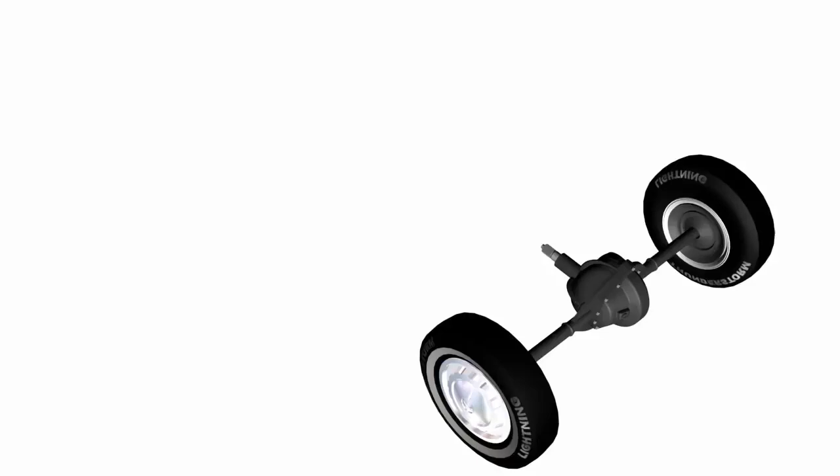Consider a situation where a vehicle fitted with a standard differential moves straight, and one drive wheel is on a surface with good traction, while the other wheel is on a slippery track.

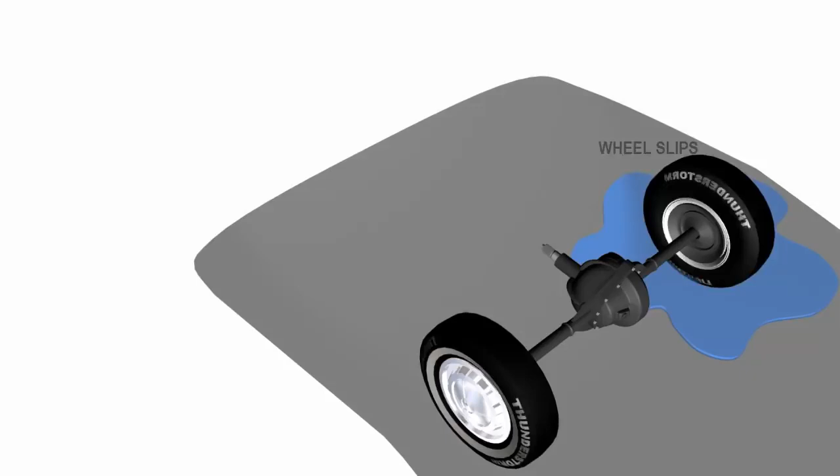In a standard differential, the left and right axle rotations are completely independent. Since one wheel is on a slippery track, the standard differential will make that wheel spin at excessive speed, while the good traction wheel remains almost dead. This means high power supply goes to the slippery wheel and low power flows to the good traction wheel, so the vehicle won't be able to move.

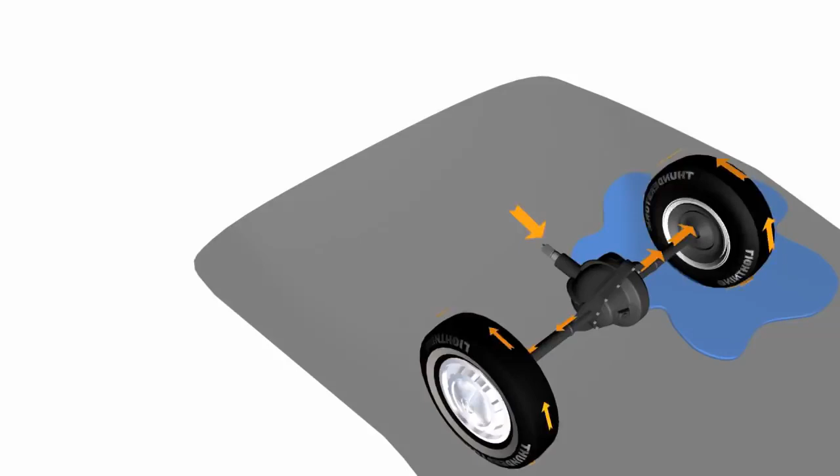One way to overcome this problem is to limit the independency, or relative motion, between the left and right axles. Limited slip differentials are introduced for this purpose.

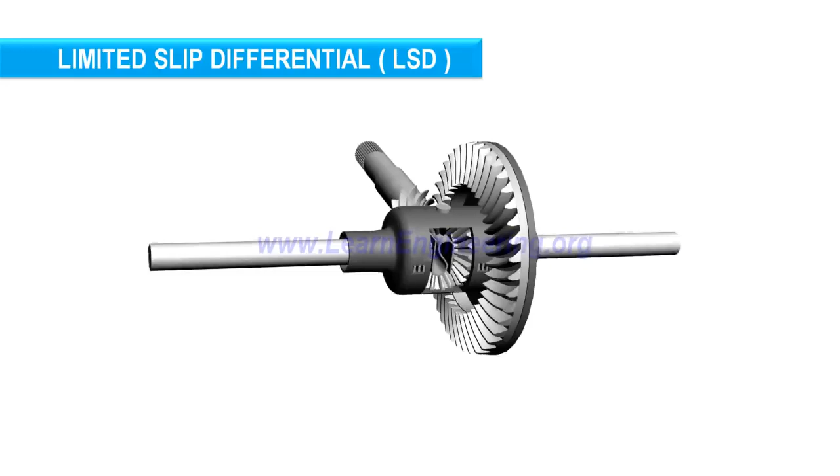One of the most commonly used LSD technologies is clutch pack based. First, let's go through its constructional features.

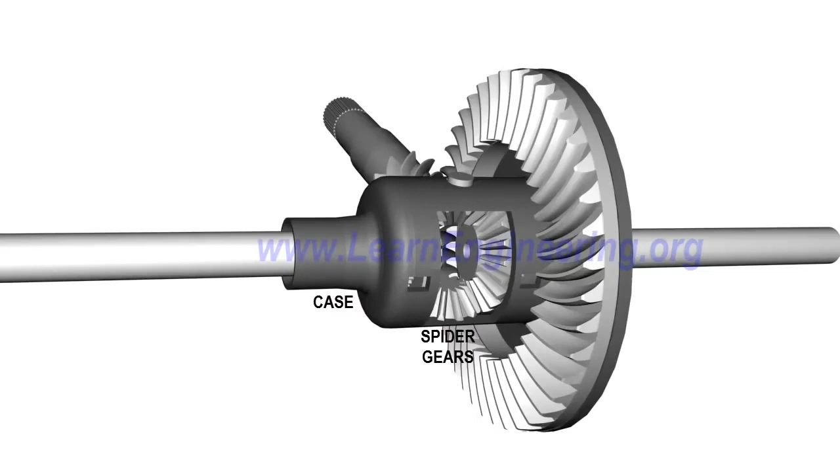Apart from its basic components, a limited slip differential has got a series of friction and steel plates packed between the side gear and the casing.

Friction discs are locked with the side gear, so the friction discs and the side gear will always move together.

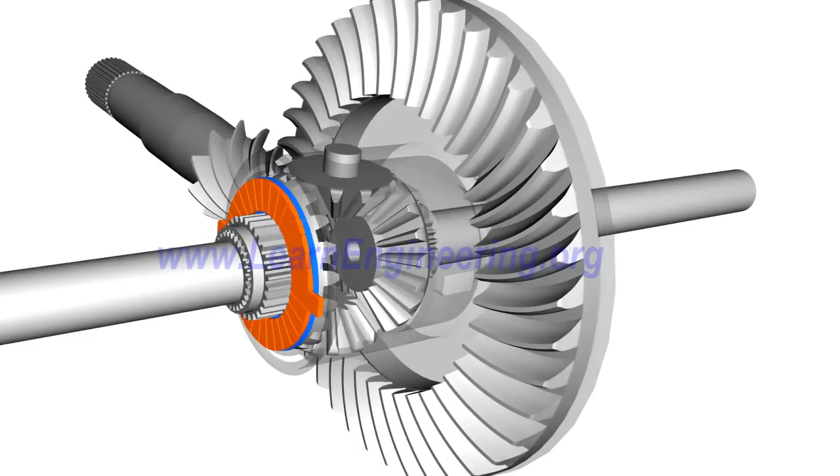Steel plates have external tabs and are made to fit in the case groove, so they can rotate with the case.

If any of the clutch pack assembly is well pressed, the frictional force within them will make it move as a single solid unit.

Since steel plates are locked with the case and friction discs with the side gear, in a well-pressed clutch pack, motion from the casing is directly passed to the corresponding axle.

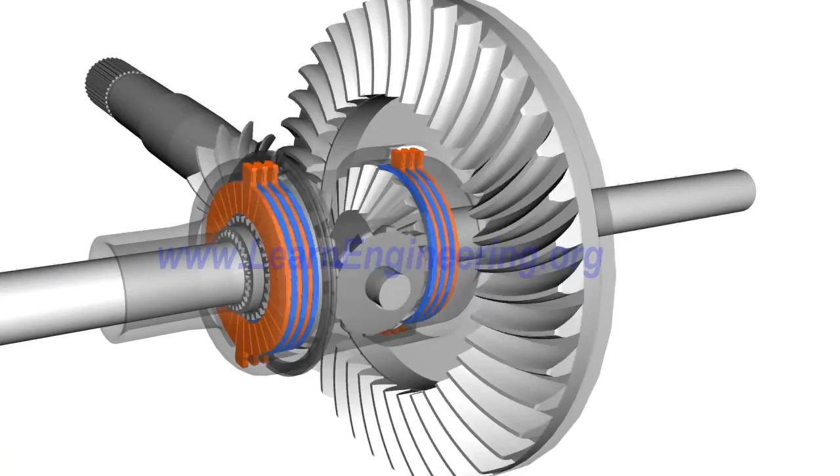The space between the side gears is fitted with a preload spring. The preload spring will always give a thrust force and press the clutch pack together.

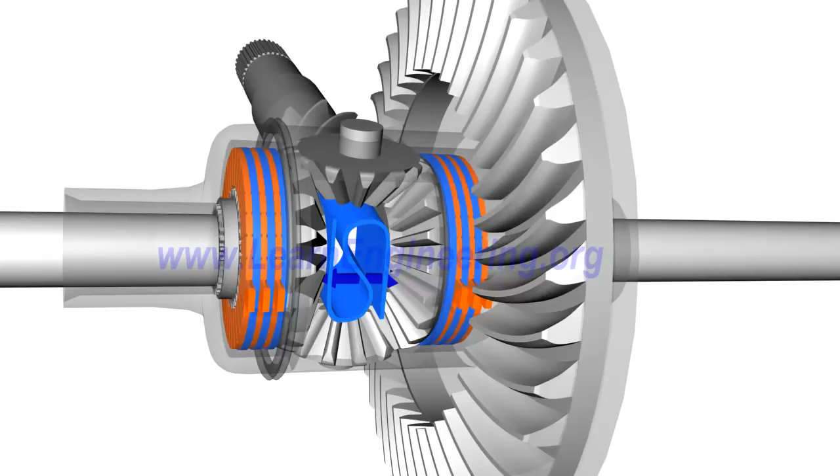You can note that the spider and side gear are bevel gears. It has got one specialty: when torque is transmitted through a bevel gear system, axial forces are also induced apart from the tangential force. This axial force tries to separate out the gears.

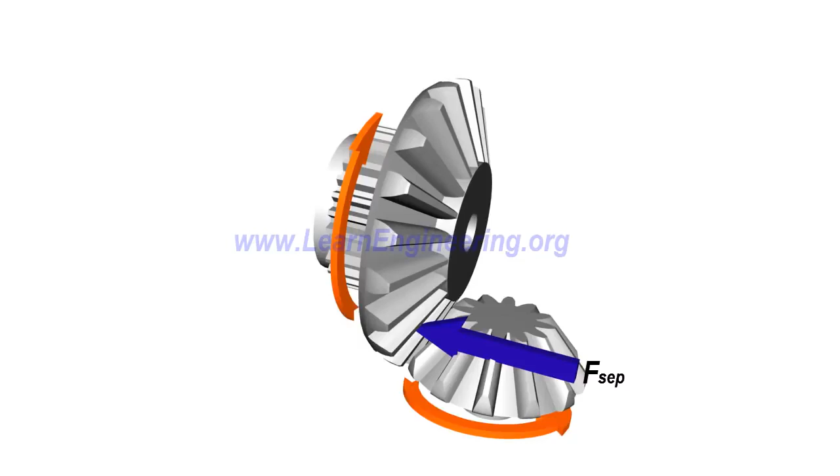You can note that the side gear and axle are two separate units. The side gear has got a small allowance for axial movement. So during high torque transmission through the spider side gear arrangement, a high separating thrust force is also transmitted to the clutch pack. This force presses and locks the clutch pack assembly against the wall of the casing.

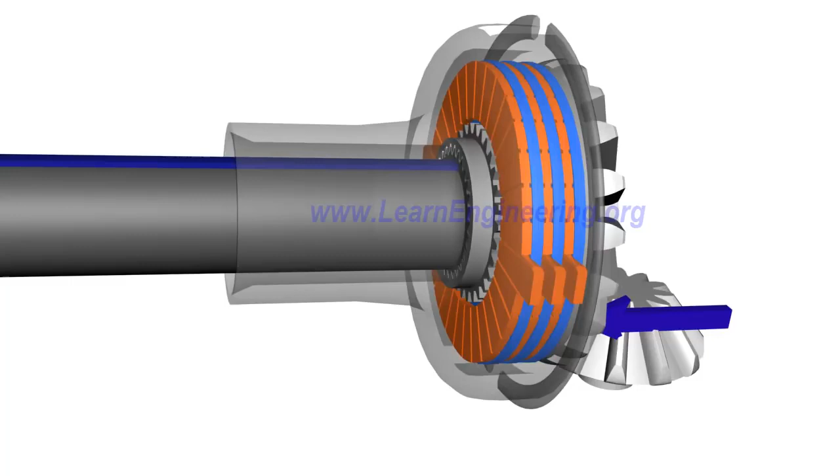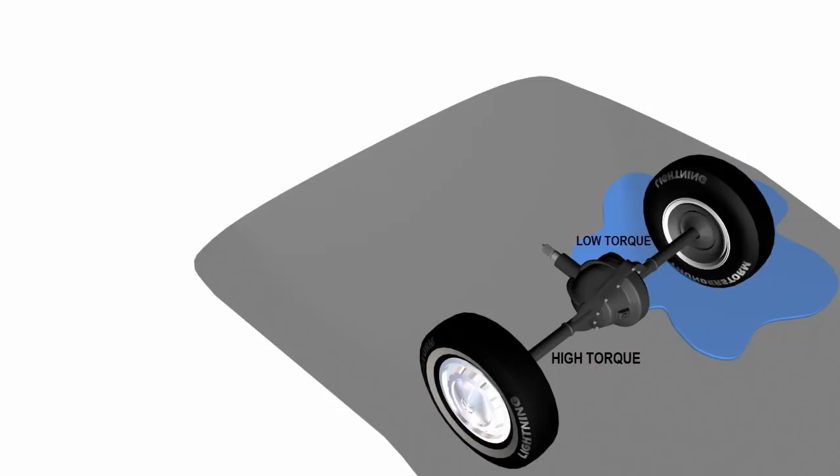Now back to the initial problem. Since one wheel is on a high traction surface, the torque transmitted to it will be higher. So the thrust force developed due to the bevel gear separation action will also be high on that side. Thus, the clutch pack at the high traction wheel side will be pressed firmly and locked.

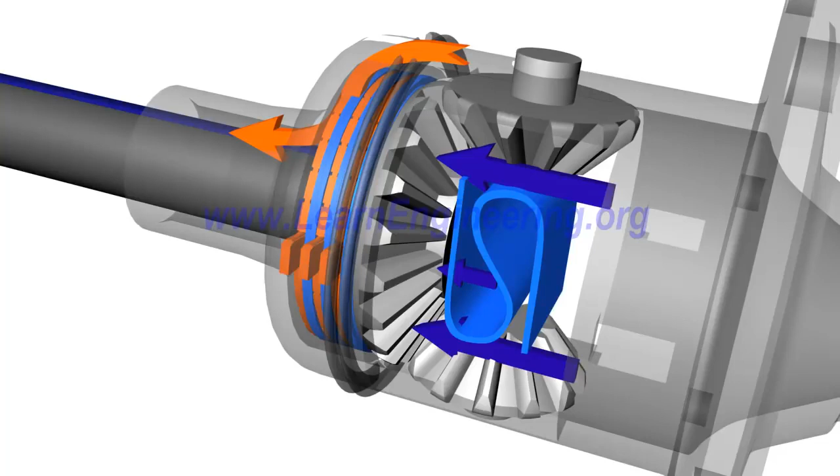So power from the differential casing will flow directly to the high traction axle via the clutch pack assembly. On the other hand, the clutch pack on the low traction wheel side is not engaged yet, so power flow will be limited to that side. So the vehicle will be able to overcome the traction difference problem.

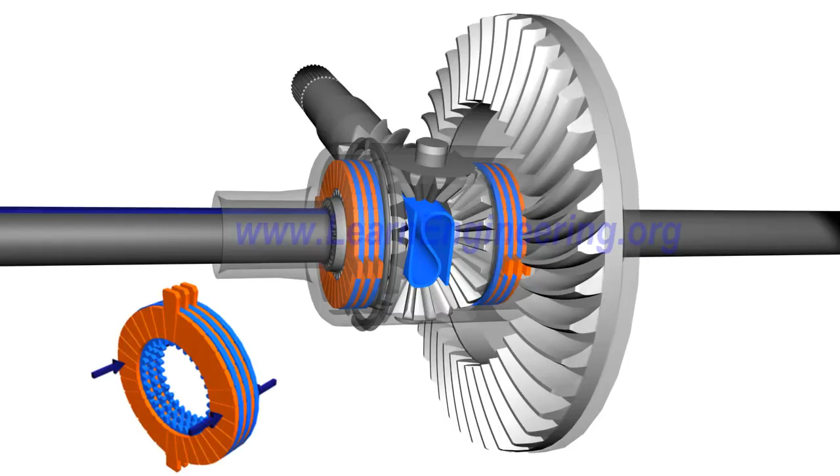However, while taking a turn, the LSD can act like a normal differential. In this case, the thrust force developed due to bevel gear separation action won't be that high. So the plates in the clutch pack will easily overcome frictional resistance and be able to slip against each other. Thus, the right and left wheels can have different speeds, just like an open differential.

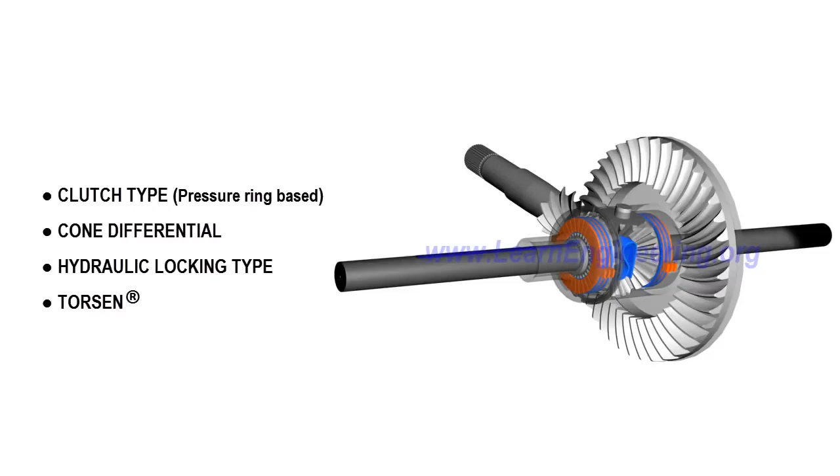Following are the other commonly used technologies used to overcome the drive wheel traction difference problem. Thank you.